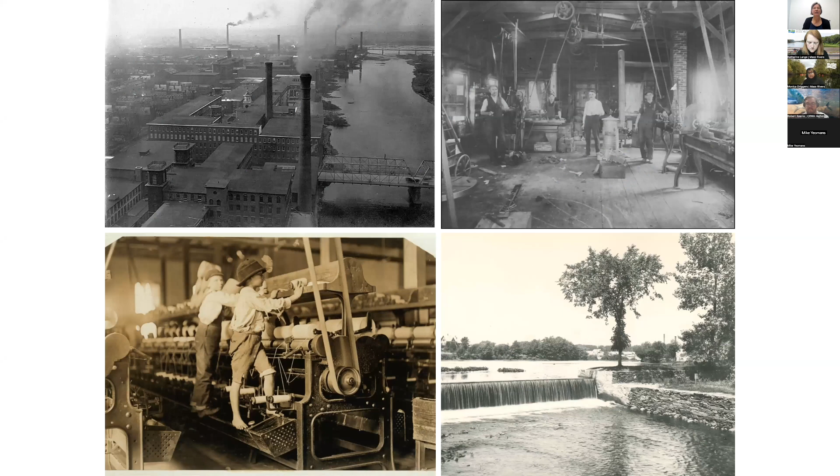Over time, as the economy changed, those small dams on small rivers became larger dams that powered New England's economy and supported trade with other countries. Dams became much larger on the larger rivers and much more established. It's worth noting that many of these dams were actually controversial when they were first built.

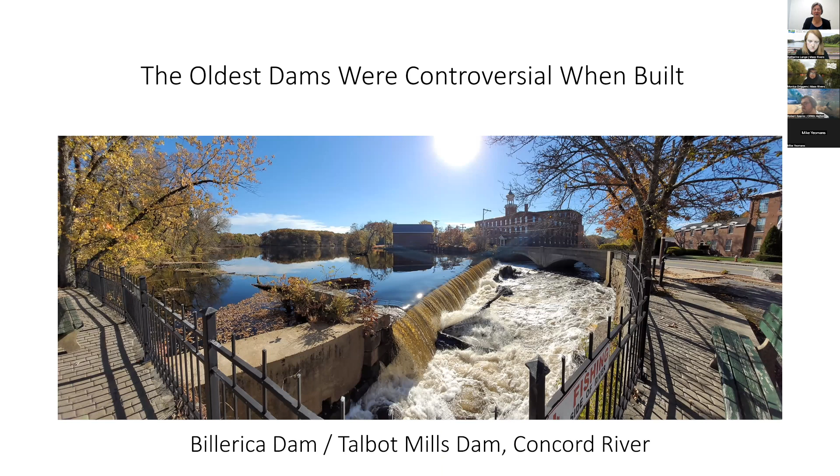A good example is the Billerica Dam, also known as the Talbot Mills Dam, on the Concord River. This lays out a short history of that river: no sooner was it built than there was a lawsuit filed against the dam owner for flooding upstream farmers. The dam was removed by force and rebuilt numerous times throughout its existence, and Henry David Thoreau wrote about it in 1839 - he has a famous quote about shad and a crowbar related to that dam.

Henry French made an impassioned speech to the Massachusetts legislature in 1861, talking about how for generations a painful and expensive controversy has existed in relation to this dam. So many of the first dams in communities across the state were also followed by the first lawsuit in the community.

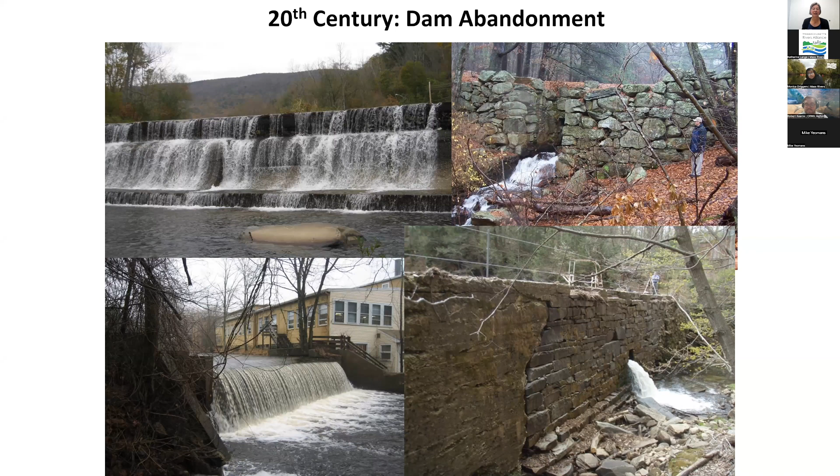So when we reached the 20th century, we reached the era of dam abandonment. This slide shows you what some of those abandoned dams look like. They're no longer needed, taken out of service from mills, and just sort of sat there and began to deteriorate. However, as they sat there over 100 years, our communities continued to grow up and develop around these dams.

This is relevant for the dam removal process. Many of the impoundments formed by the dams have taken on informal uses. The dams themselves are very much tied into the infrastructure of our communities—tied to roads, bridges, buildings, utility lines. So a dam can be taken out of service for many years, yet still be linked through infrastructure and through people's everyday lives in the fabric of the community. That creates both challenges and opportunities for the dam removal process.

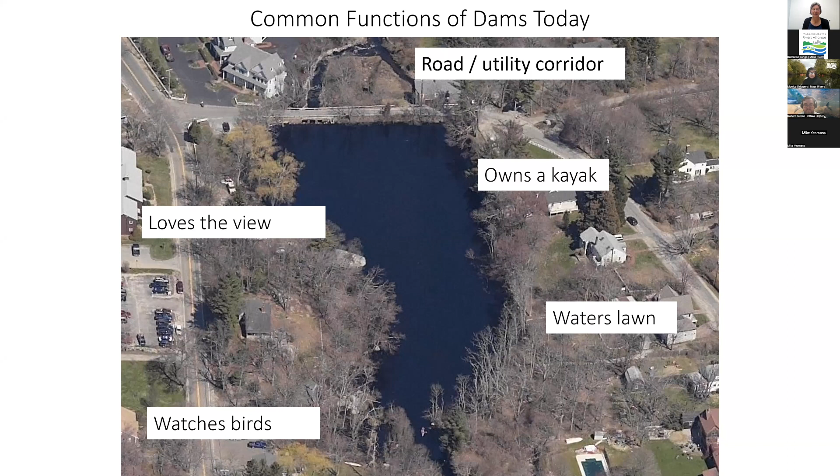So now we're in this era of dam removal, with many dam owners pursuing removal, which I expect is why you are all here today.

So I'm going to shift gears now from this overview of dams to speak briefly about the role of the dam removal project manager. A dam removal project manager has been described in many ways.

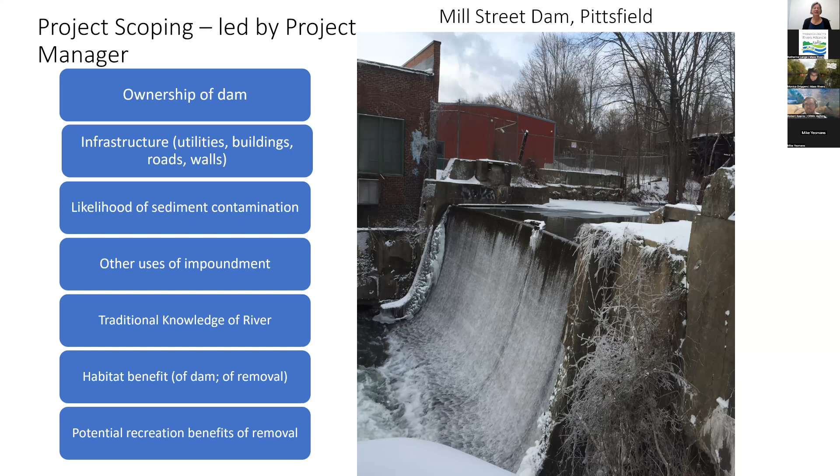So scoping, you're pulling all this information together, and this will be the foundation of your project.

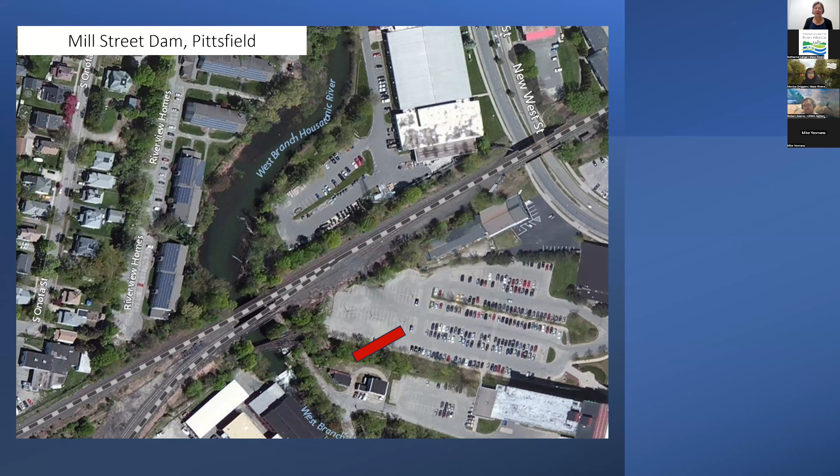So in this picture, right upstream from the dam, which is just immediately downstream from those railroad tracks, you would look at, for example, the railroad tracks. You would look to see if there's any other bridges in the vicinity that could be affected. I see some buildings near the dam, so you'd be wanting to know how a dam removal might impact those buildings. I see a housing development along the river - is there some way that housing development could be impacted, etc.? The take home is that pulling together aerial images like this are a huge help with project scoping.

So after you've scoped out your project, the next step is to find a qualified consulting firm that will help you do a cost and feasibility assessment. I believe we have a webinar focused on this topic, so I'm not going to go into a lot of detail - it'll come up multiple times in our webinars on how to find a qualified firm, what you're looking for. But the gist of it is you're going to hire a firm which will take all that scoping information you gathered, and they'll help you figure out what the major technical issues might be and how much it would cost to address them. That is basically your feasibility analysis - what are the major technical issues and how much would it cost to address them in a dam removal project?

This is also a great time to incorporate community concerns and interest. So if there's interest, or you think there could be interest, or you see an opportunity for other community benefits, this is a great opportunity to cost those out - whether it's a boat launch, a nature viewing point, additional stormwater management near the dam, trail development, or any other benefit that you see of value to potentially incorporating into the project.

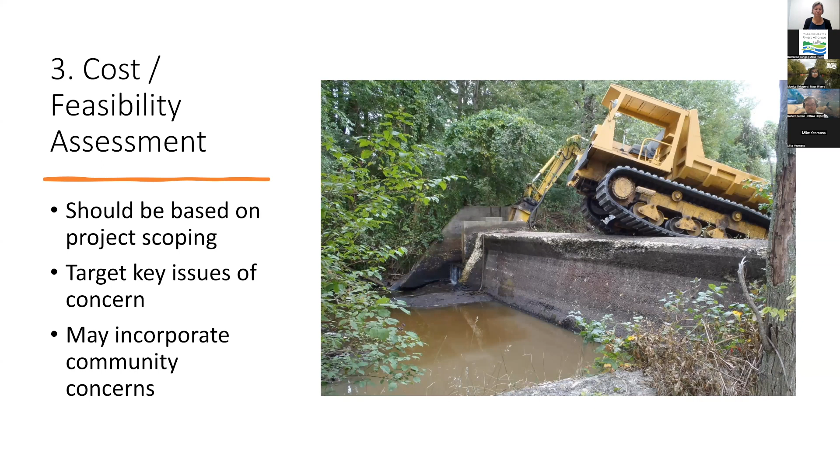Sorry, I keep forgetting I have that little excavator coming on there.

So engineering and design - these are examples of some of the activities that take place during that process. You're essentially trying to come up with an on-the-ground plan. The purpose of engineering and design is to give you engineering plans that will tell the construction contractor how they're going to remove the dam, and also to collect and resolve a wide range of technical issues, and to provide the foundation for permitting. So that's really three goals that come out of the engineering and design process: the actual plans that tell the construction company how they're going to remove the dam, the information you need for permitting, and resolution of technical issues.

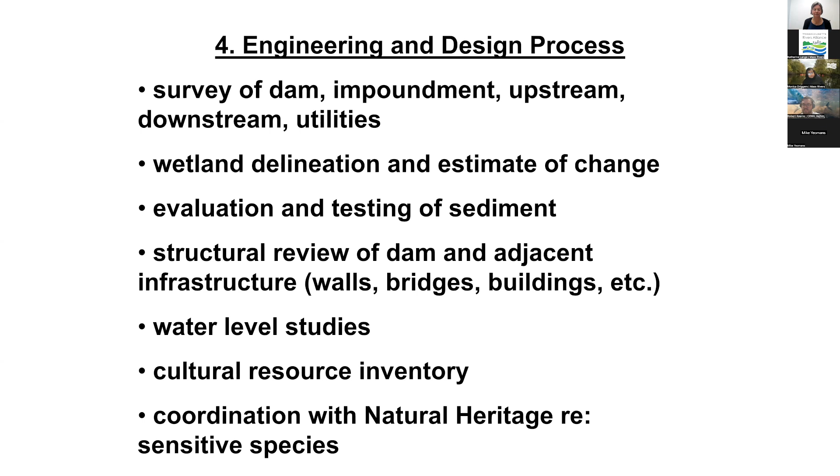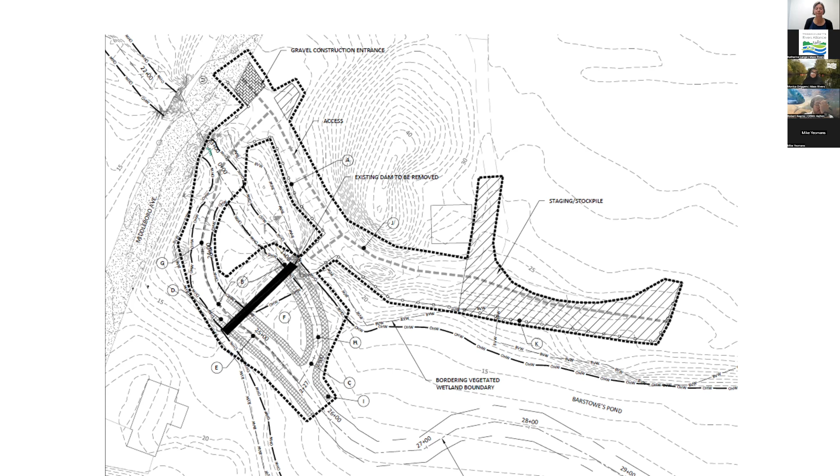Okay, so now having just spoken about engineering and design, we're going to talk briefly about permitting. Massachusetts has a long history of environmental protection, and we have many, many regulations that have a goal of minimizing impacts to sensitive resources like rivers and wetlands.

Permitting can take anywhere from, I would say, 9 months to a year and a half. It can take longer if there's some regulatory challenge, and it can also go a little bit faster if a project is extremely simple and very small.

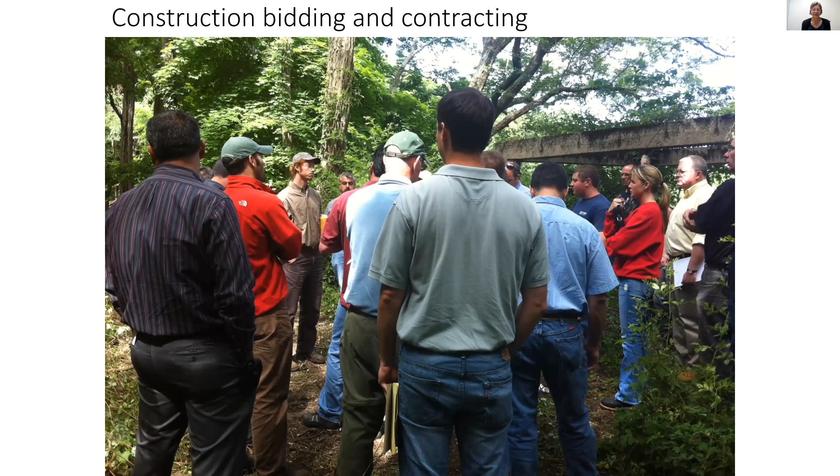From there, you are very close to construction. You update your engineering plans with any feedback you've gotten from the regulatory agencies, put the project out to bid, and then from there, it's construction and dam removal, which is super fun and exciting to be involved in.

So I would say that project scoping is really an important step to invest a lot of time in before leaping into hiring an engineer for the rest of the process.

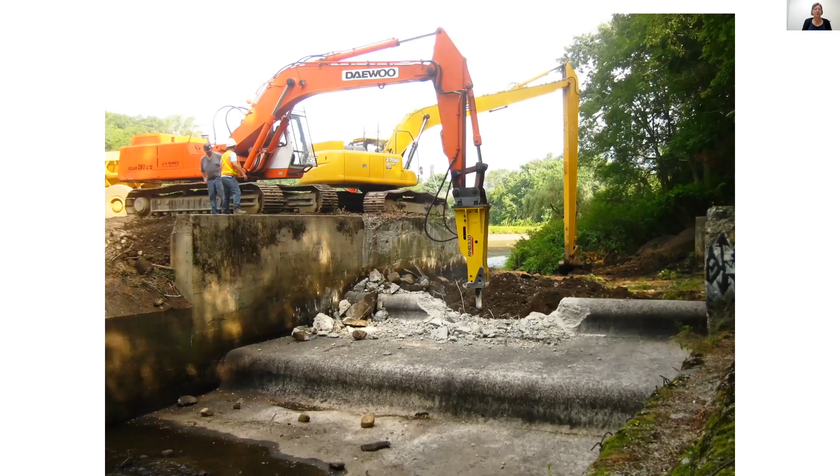So just looping back here to the role of the project manager that I spoke about at the beginning. I'm just going to quickly go back to that diagram. The role of the project manager is to keep this big picture map in their minds, adding in the fundraising and the public engagement component, and to essentially guide the project from step to step and phase to phase.

They're the keeper of the knowledge, so they remember and know all of the information that comes out of each of these steps. They're often the face of the project to others, but really it's guiding the project through each of these steps and helping each of the organizations or entities involved understand what their role is, what the timeline is, and what the outcomes you need are. So you are really the keeper of the schedule, the knowledge, the process, and have to tactfully and strongly guide the project through each of these steps.

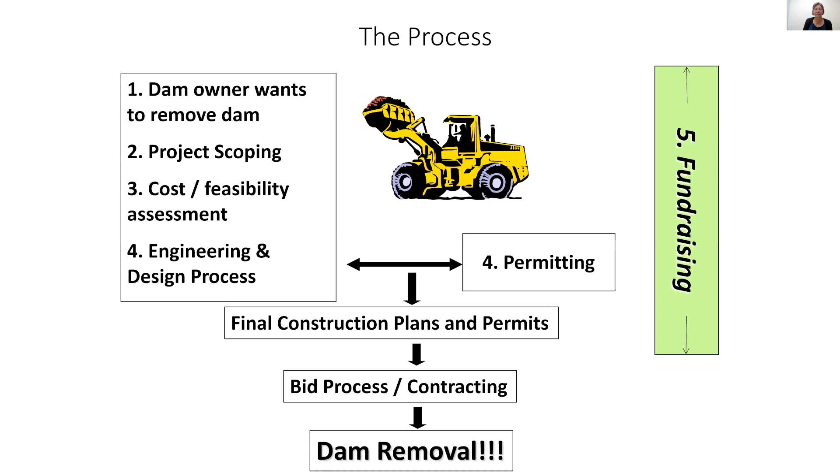So just closing with this shot of construction, which is the reason we invest the 3, 4, or 5 years in engineering, design, and permitting.